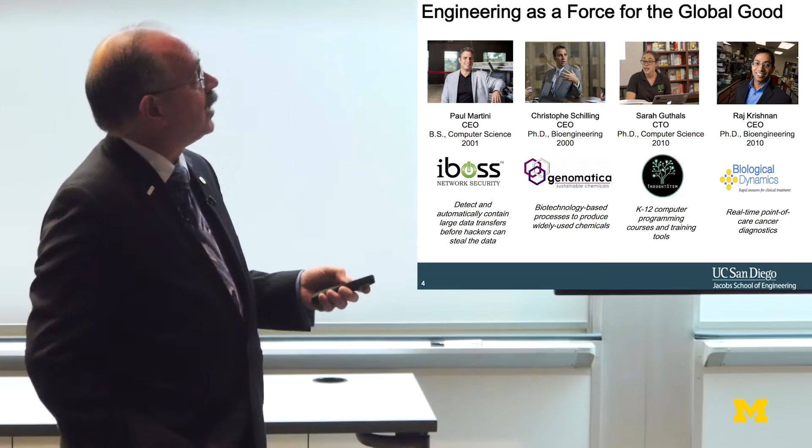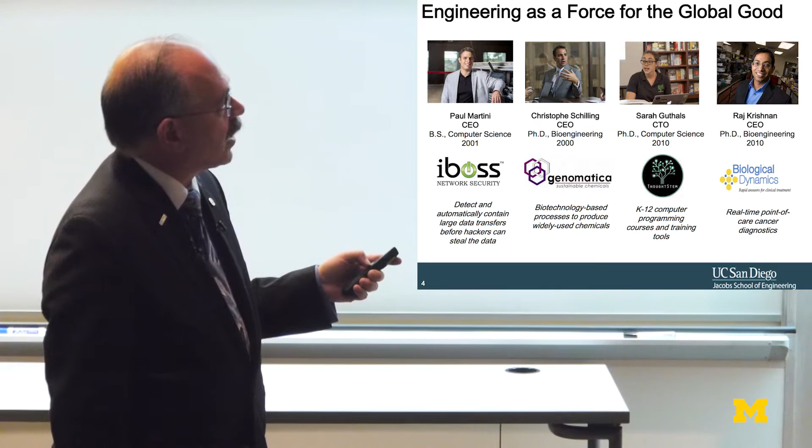And Raj Krishnan says, hey, you know, what if at the same convenience of a pregnancy test, or maybe more appropriate, a Lancet test for diabetes, you could find out if you have one of several common forms of cancer. Can you make a point of care cancer test that will use exactly one drop of blood? And indeed, he did the preliminary research in the bioengineering department, and he ran off and founded Biological Dynamics. So these are quickly growing and up-and-coming concerns. I'm sure every school has a similar set like this, but I just wanted to let you know that we're in the thick of it when it comes to the entrepreneurial effort.

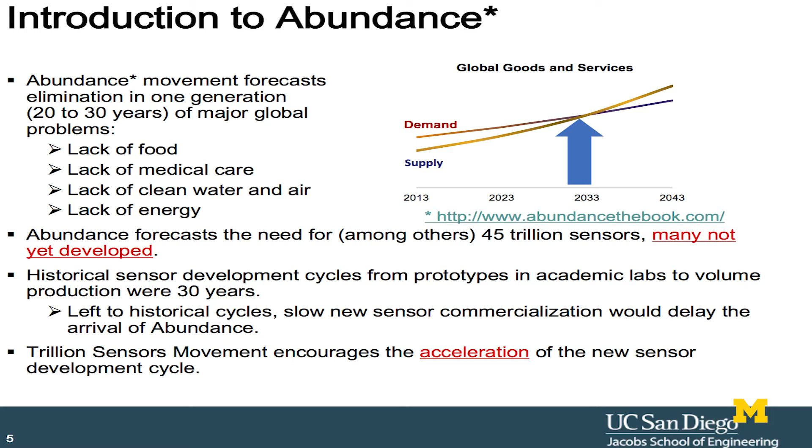Let's back up for 2 or 3 minutes and talk about a global issue, and then we'll dive down into particular projects. I don't know if anyone here has read the book by Peter Diamandis, and I forget the co-author, apologies to the co-author, called Abundance. It was a pretty popular reading 2 or 3 years ago among all the corporate CEOs, at least the ones that I knew about.

And the basic premise is this. I'm sorry for all this extra detail. I'll just cut to the chase, which is that this planet has a chance of shifting the supply and demand curves by somewhere near 2033 if we do a number of the right things.

By abundance, I'm saying, what if we could alleviate issues with food, medical care, clean water and air, and energy? What would we need to do in 20 to 30 years, in other words, in one generation, to shift the supply and demand curves for that?

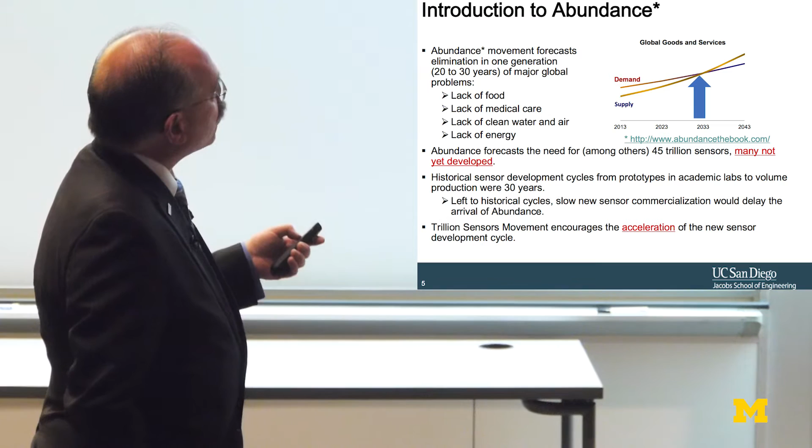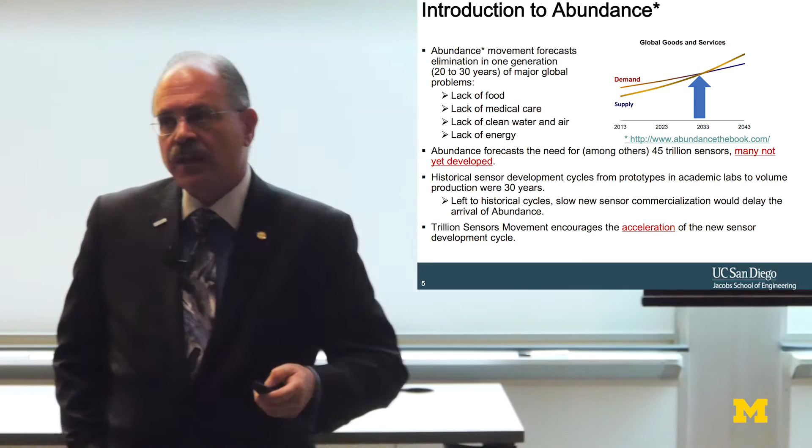I'm not going to talk about the sensors right now, but the point is, what industries would you have to launch? What industries would you have to generate engineers for? What industries would you have to clear the path for using policy decisions?

What industries should you grow in order to actually solve that problem? And if you believe what you read in the book, and I like to because it turns out my school's got all these covered, the idea is let's look for exponentially growing technologies that will basically get into large markets very quickly. The first impact is, of course, those companies will improve the quality of life in the first place. However, they will drive the global economic growth that we need in order to address many of the problems that these particular industries can't address.

Now, it's not the panacea, I'm not going to say all you need is engineers. We all know that it takes many kinds of professions to make the world go round correctly. But I'm offering the posit that if you make big investments in biotech and bioinformatics, medicine, nanomaterials, nanotech, networks and sensors - and my favorite part is I think we're going to need about 45 trillion sensors in the next 20 years - digital manufacturing, computational systems of other kinds, AI and robotics, you could argue how to divide those two. These are the areas that are really going to generate the big markets that we need to carry us forward from where we are now.

And if you look at waves of technology, 20 or 30 years ago, all the computer operating systems companies matured. The next wave was mobile apps. Now we're going through a wave of social apps. Well, what happens after those waves? I think some of the next waves are going to come from this list.

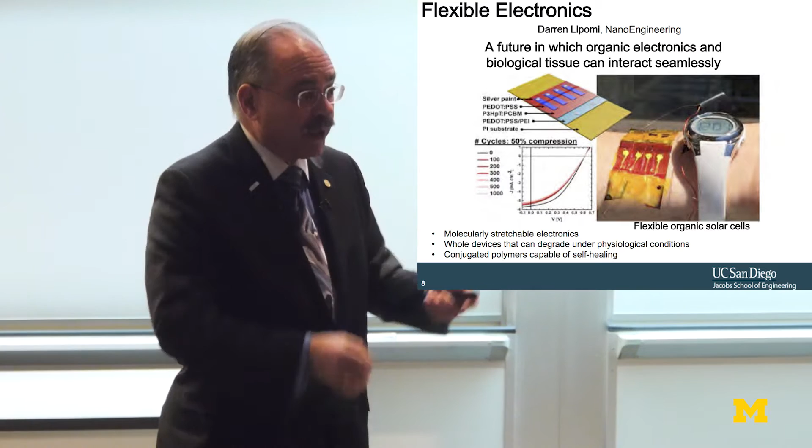And so just a few interesting examples of what you can do when you pull that group together. This is the work of Darren Lipomi, who came to us from Stanford. He does intrinsically elastic semiconductors. The molecules themselves have aromatic rings or other things in them so that they are intrinsically elastic. We're not making a spring by winding wire to add compliance - the wire is intrinsically elastic on its own.

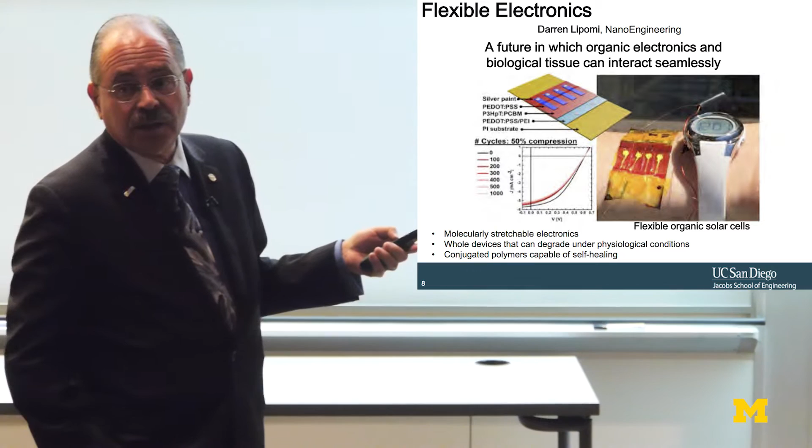To show just how effective that is, he's put an elastic solar cell taped onto an arm, with a wristwatch. We're doing a 50% tension compression test, and you can see that even after 1,000 cycles, the performance is the same as it was before. You just stretch it and come back, again and again, and it's still performing with the same output. So we've become very deep in molecularly stretchable electronics.

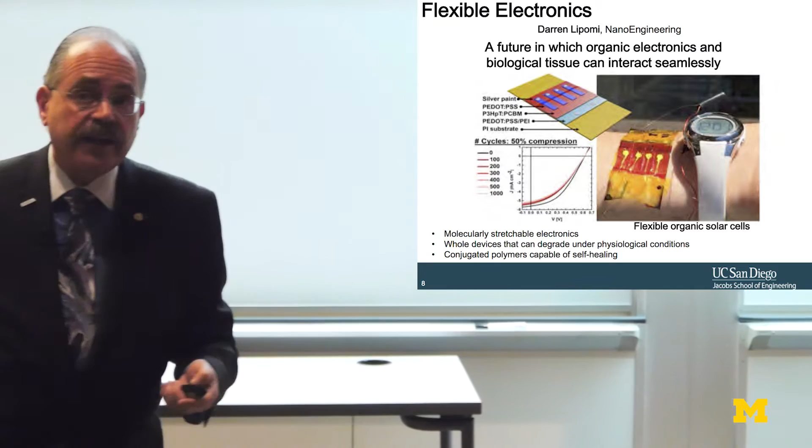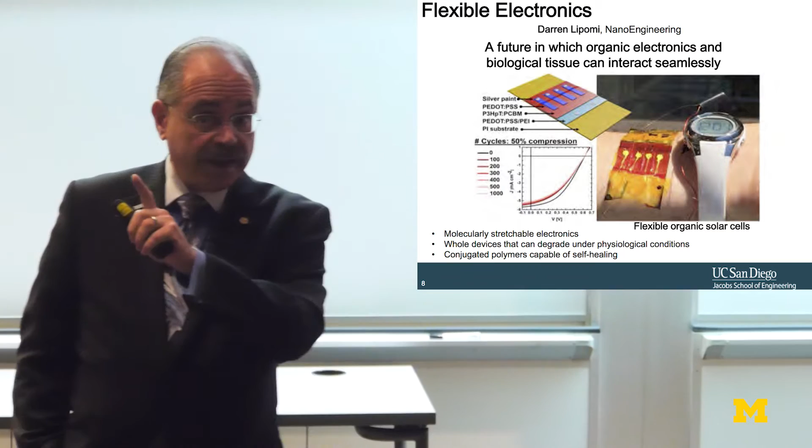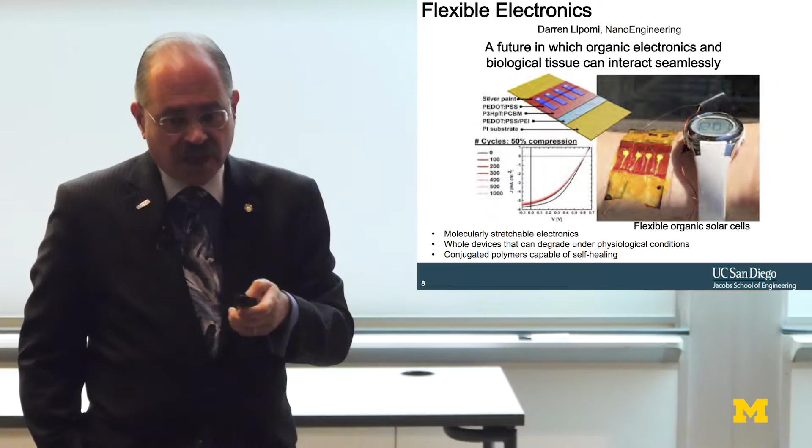If you know the San Diego region, you might say, yeah, you got great beaches, good. And you got the Navy there, the biggest port in the Pacific, bigger than Manila or Hawaii. But we also have one of the biggest biotech arenas in the country, first or second biggest. They call it the Mesa, the large flat rock formation just north of La Jolla, just north of the campus, where there's a huge phalanx of biomedical research. The Salk Institute is there, Sanford Burnham, all these places that really do a lot of biotech.

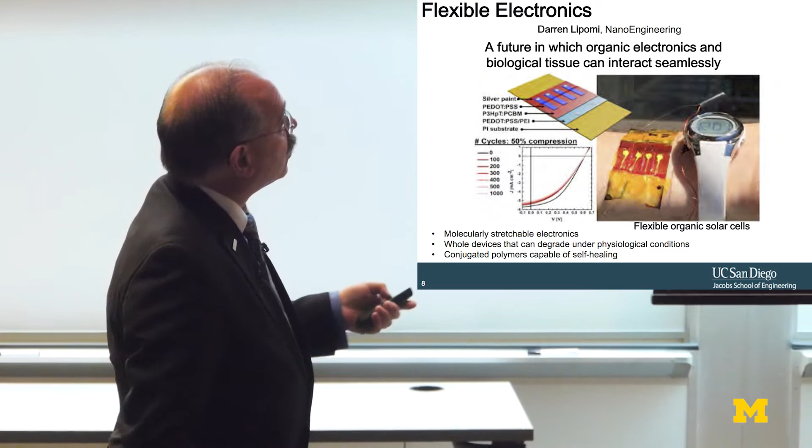So if you look at the fact that you can start talking about skin-level stretchable electronics that humans can wear, this has a big application in the biotech industry, the biomedical industry.

And indeed, if you come and visit, you can see this mannequin, which stands at attention, or more or less a San Diego style attention—kind of like surfer dude, maybe I'm paying attention to you attention. He actually displays a whole bunch of technologies, including temporary tattoos that measure pH, or metabolite sensors that can measure the lactate in your sweat.

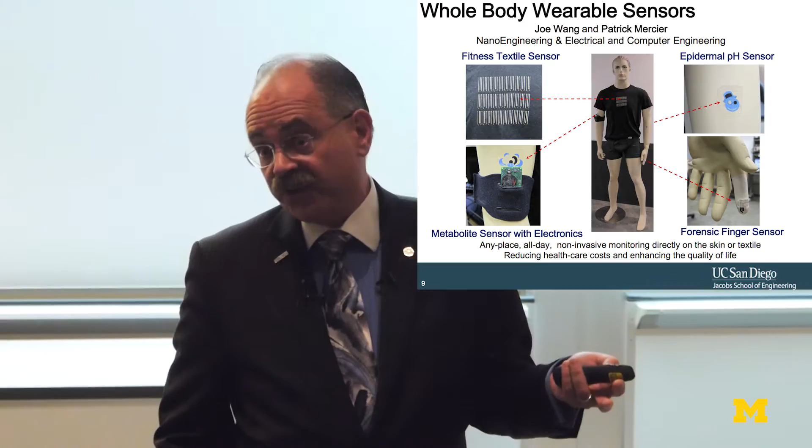Because you may not realize your sweat glands are filters, but they're only 98% efficient. So all you need—and I'm saying that sarcastically—is something 50 to 100 times more sensitive, 50 to 100 times less expensive, elastic, and able to run on maybe 100 nanowatts. And hey, you've got a functional sensor. Sounds like a tough set of technical projects, but we're making a lot of progress on that. Indeed, this is one of the areas we're concentrating on.

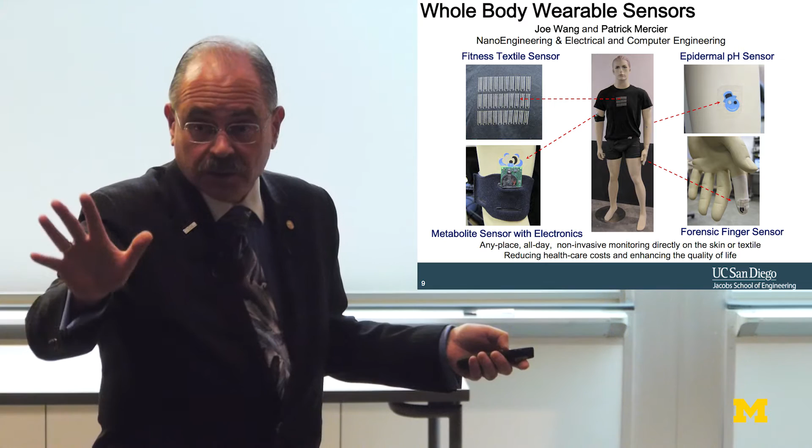By the way, you don't have to put all this technology on skin. You can put it on latex rubber, and then wear gloves that have sensors detecting deleterious chemicals that are harmful to your health.

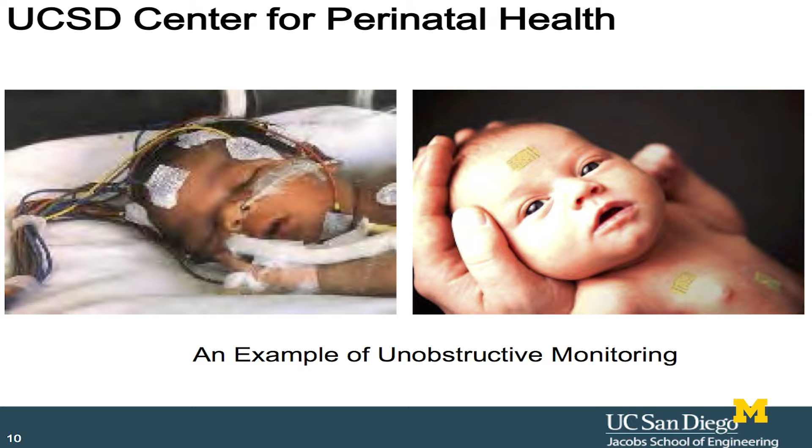This photograph has not been touched by Photoshop. This is an actual photograph, no mock-up here. The infant you see on your left is a premature baby in an intensive care unit, and the infant on your right is one of a set of test patients in 4 hospitals where the work of Todd Coleman is already being tested. The sensor you see on the right includes stretchable electronics, an antenna, some very low-speed circuitry, and we're actually making metabolic measurements on that infant, as you see in that picture.

This is not 'what are we going to do in the future?' This is happening now—he put these first versions out 8 months ago. Now, you're in a biotech hub and you start showing stuff like this around, and you get people talking entrepreneurship left, right, and center. So, I think we may be hitting a home run on this one.

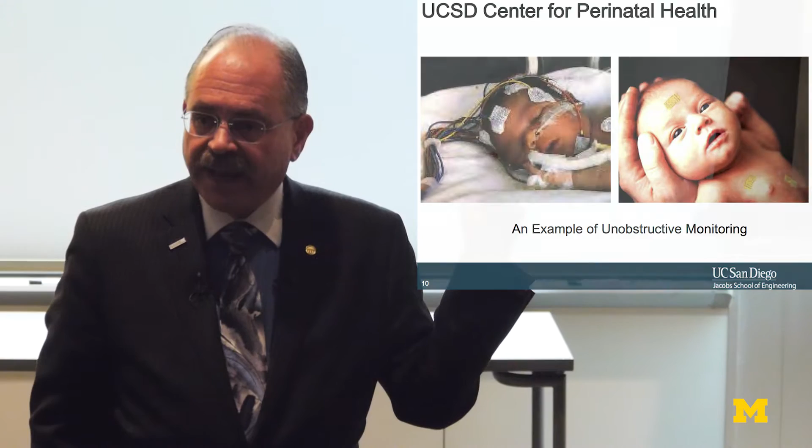The untold story here is that each of these adhesive patches is only good for so long, and there's a regimen by which you have to take the sensors off to let the infant's skin heal. Now, look at the size of the adhesive patch, look at the size of the kid, and ask yourself, how many times can I move that before I run out of fresh skin? That's actually a big problem. One of the issues with instrumenting up an infant is that you get all sorts of skin infections, which just add to the list of things the poor child is suffering.

So we're seeing a lot of push to move in this direction, and we're galloping forward as fast as we can. This is a close-up of Todd Coleman's work—an actual functioning sensor, I think this one is measuring lactate as well. You can see that you can squeeze it or stretch it; 50% strain is no big deal, and it remains functional.

The early work was actually published in 2011, and we're in hospital trials right now with this sort of thing. So there's a very direct example: we're going to do something that people are going to feel the difference about immediately. And I'm very pleased.

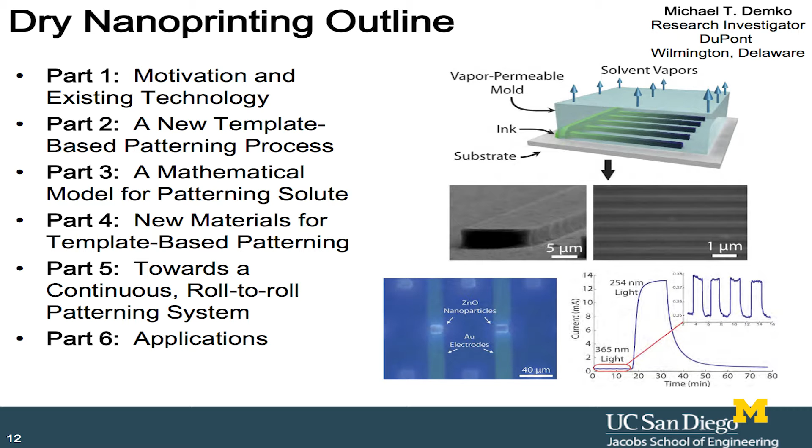So let me shift a little bit and say, well, it's one thing to make all those lab prototypes—how are you going to make 1 trillion of those? You know, 1 trillion's a big number. I know astronomical units come in groups bigger than that, and yeah, you can count molecules with Avogadro's number, but 1 trillion is pretty big.

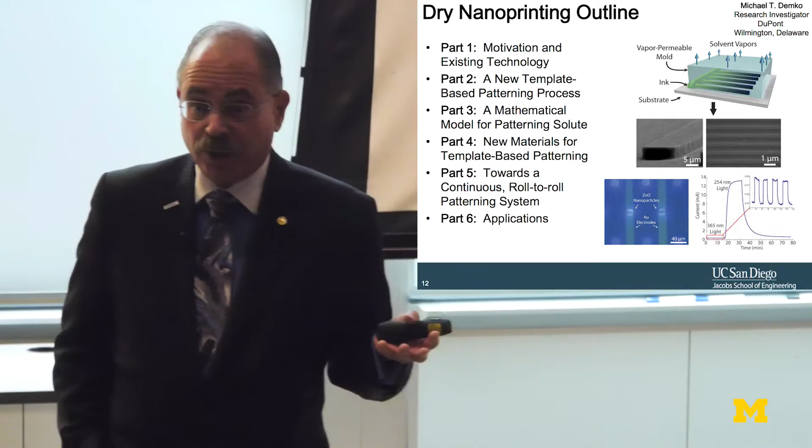33 million cars are made in the world each year—that's a big number. 300 million people in this country, that's a big number. 900 million cell phones manufactured last year—whoa, that's a big number. But that only gets you to 1 billion.

So imagine if everyone who bought a cell phone actually bought 1,000. Imagine the size of a pile of 1,000 cell phones. All right, that's 1 trillion. It's too easy to talk about big numbers, so let's talk about boxes of cell phones following you around—that's a big number. So what are you going to do if you decide you want to make 1 trillion of something?

So I say we're going to print them. Now I know there are many different ways of printing, but I'd like to spend a few minutes talking about how you might print them in an alternate way. And I'll give you the punchline. It's 4:30 exactly, I'm going to finish at 4:50 exactly. I'll tell you the answer right now, and then I'll show you enough slides to make you believe me.

So the way to do it is: one, you're going to use an ink stamper in which the ink flows into the stamper after you put it in contact with the surface. Second, you're going to keep all contact pressures at 1 atmosphere or less, because I'm not going to spend a lot of money creating pressure. Third, no temperature in the process ever is going to go above 60 degrees centigrade. And I'm going to print up to 4 inks at once with 1 stamper—put the stamper down, print 4 inks to do 4 well-registered features, then take it off. Oh, by the way, when I take the stamper off, the ink is dry.

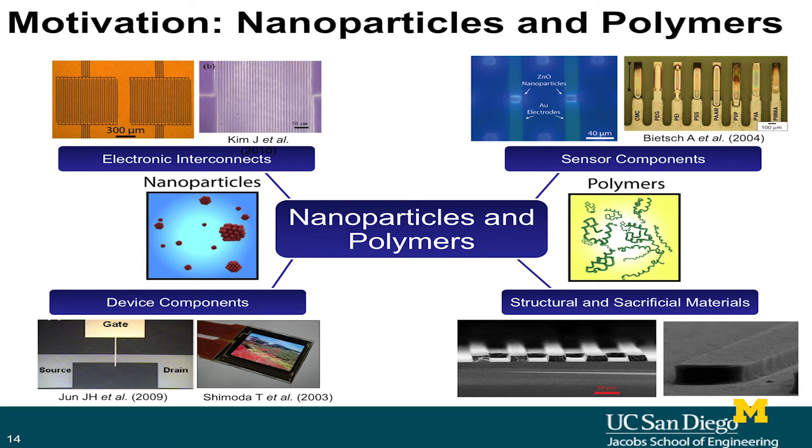So yes, we can talk about the genealogy of printing, and I'm not taking anything away from any other method because they all have special uses. I'm saying that I'm betting my money on template-based printing. And under template-based, you see things like gravure, nano-imprinting, or maybe micromolding in capillaries.

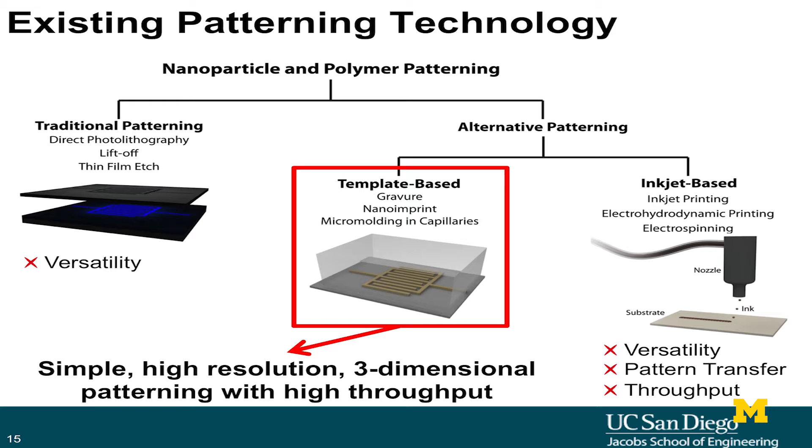Gravure is a great process for doing very fine, very accurate structures, right? But if any of you have ever done it, you realize that in gravure, you're spreading the ink first, taking a hard stamper, and crushing it down at great pressure in order to push the ink away from where it shouldn't be. That means you always have a cleaning step—which reminds me, I forgot to tell you, in the process we're using, no cleaning step either. So you don't have to, it's just done when you lift the printer's stamper. Manufacturing guys kind of like that, and I figure in this town, you guys understand what manufacturing guys like, right?

Okay, yeah, is it like I just touch it and wait and take it off? Yeah, it's done. Good, I like that. Let's truck that into the factory. So the game is the following, and again, here's the innovation that we did.

So you take a substrate and a template, where the template is either PDMS or PMP, a permeable polymer. All stampers are soft permeable polymers. The first thing you do is soak the template and the surface with water. No ink yet. You assemble everything wet, a complete wet assembly. There's no air anywhere. Then after you make contact, you apply nanoparticle ink.

You can just puddle the ink at the side, and it will naturally fill the mold. Everyone would say, oh right, capillary transport. The answer is no, because everything's wet, so there is no meniscus. It's not capillary transport.

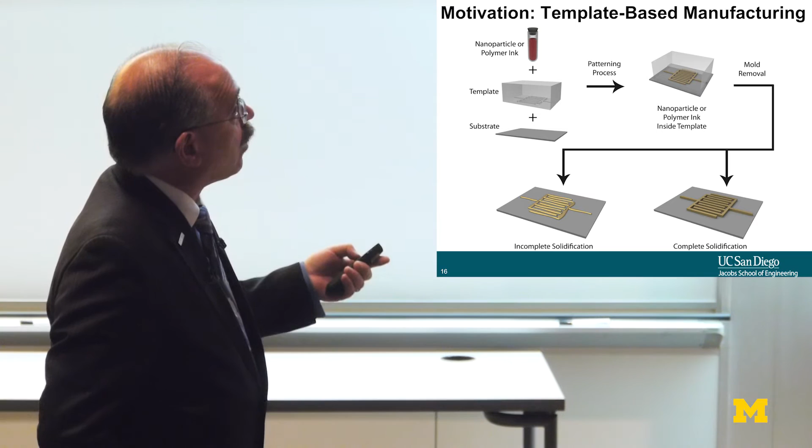What you're doing is evaporating all the solvent out of the permeable polymer, and it's actually a negative pressure process. So all your thoughts about laminar flows and capillary limits, no. We're going to dodge all those things.

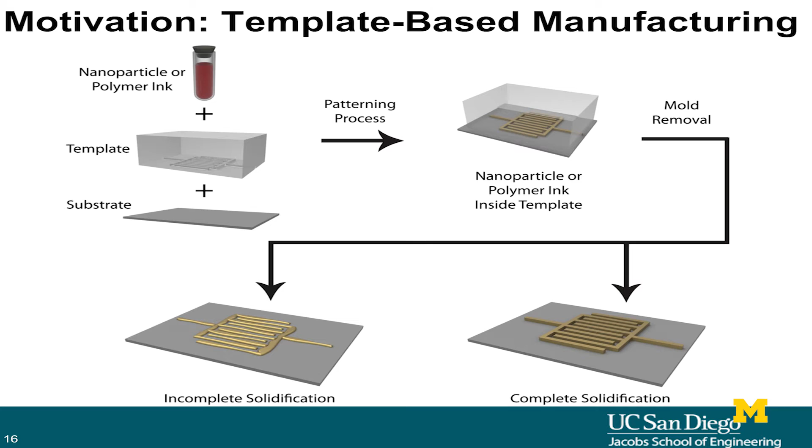What you do is make sure everything stays mildly warm so that the evaporation goes fast enough. If you take it off too early, you get this. If you take it off a little bit later, you get that.

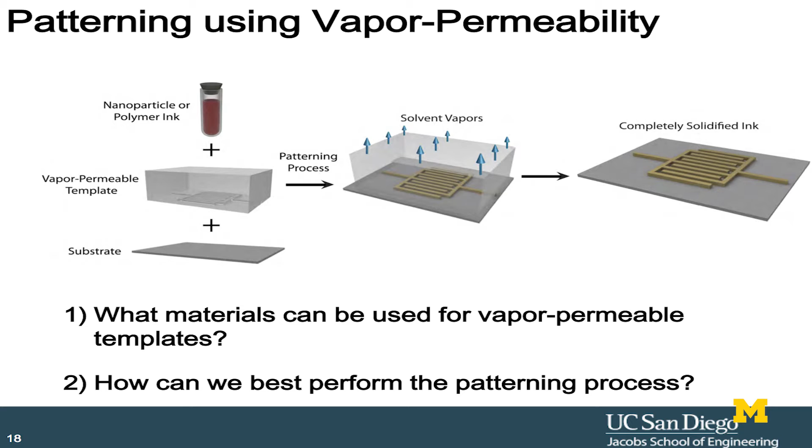The question quickly becomes, what can I use to get the water out of there as fast as possible? We're engineers, you get an idea, now you start peeling back the onion. Okay, wet assemble, yeah, but I want dry disassemble. So I need something that gets rid of water right away. And what's the best way to do the patterning process itself?

If you take a look at available materials, every MEMS guy is going to jump immediately to PDMS, polydimethylsiloxane, otherwise known as General Electric tub and tile sealer. The solvent for making that liquid, which you spin cast, is ammonia. So if you can stand lots of ammonia in your lab, you basically dilute silicone rubber tub and tile sealer, and use that as a MEMS microfabrication material, and it works fine.

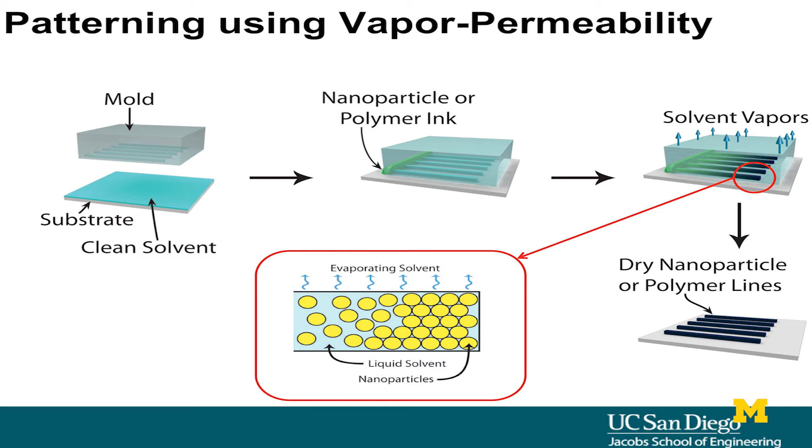PDMS works just fine. What we're showing here is that if you keep pooling nanoparticle ink at the left, using densities of about 1 to 2%, so it's very dilute. The organic solvent equivalent of this would be lacquer, mostly solvent and a little bit of pigment. So we're using very low density inks, and we're just waiting for the particles to pile up at the end of the capillaries. Then as the solidification front travels back, you're basically doing your printing.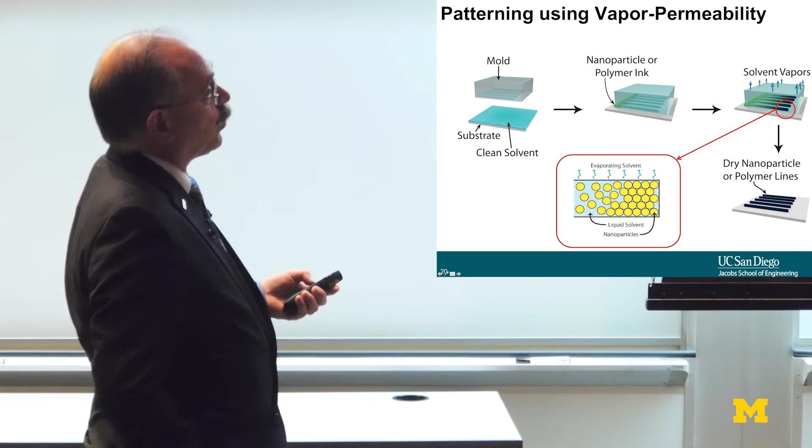Well, is it any good? Sounds like it kind of works in coarse mode. Let's just see how far we can push this process.

The first thing I'll show you is that using the same stamper, you can change all the chemistries around at will. For example, we're going to print gold nanoparticles on polyimide and then gold nanoparticles on glass. No big deal. The interesting thing is this is an absolutely clean process, we use this pattern to show that you do the printing, there is no cleaning step, and you cannot find gold nanoparticles anywhere else.

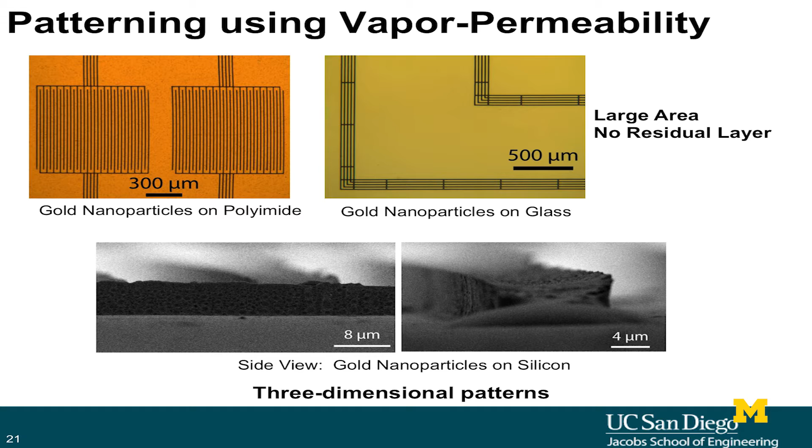Now, gravure guys have a hell of a time doing stuff like that. And if you look at the cross sections, you say, well, it's not perfect, but boy, that's pretty good for a soft stamper. That's a 4-micron size reference there, and that's a 5 or 6 micron high printed structure. Now, that's not easy to do with printed materials either.

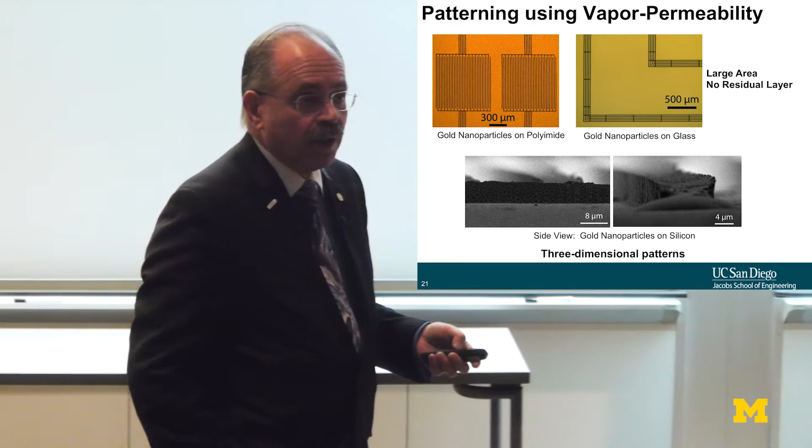Well, what other things could you print? How about PMMA on silicon, or a cell culture on glass? How about if you want to print PVDF, a high breakdown voltage polymer? Or how about chitosan on glass?

Now, chitosan is an interesting material. Chitin and chitosan are two versions of the same material, which is what nature uses to make butterfly wings, beetle shells, shrimp shells. It's a very good structural material of the insect world. Humans use collagen and calcium, and plants use cellulose.

Chitosan is also widely available. It is used to take heavy metals out of water. It's a filter material.

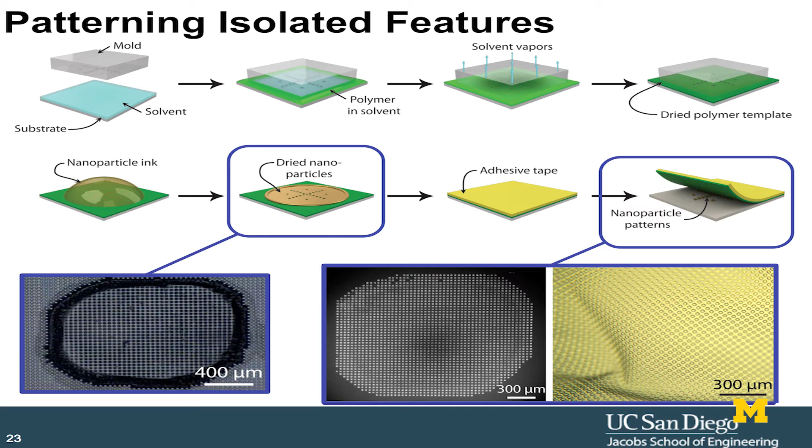We're going to use a secret template removal system called Scotch brand magic tape. It pulls off the unattached particles, but the ones that got through the template and touched the surface are bound by Van der Waals forces strong enough that Scotch tape doesn't pull them off, and bingo, you have yourself an assembled structure. And here's some examples.

Well, what if you want to print multiple inks at the same time? Well, then you have multiple channels. So here's an example. How about cellulose acetate and ABS plastic on glass? How about cellulose acetate and PMMA? How about gold nanoparticles and cellulose acetate? So simultaneous printing with a soft polymer and extremely good registration.

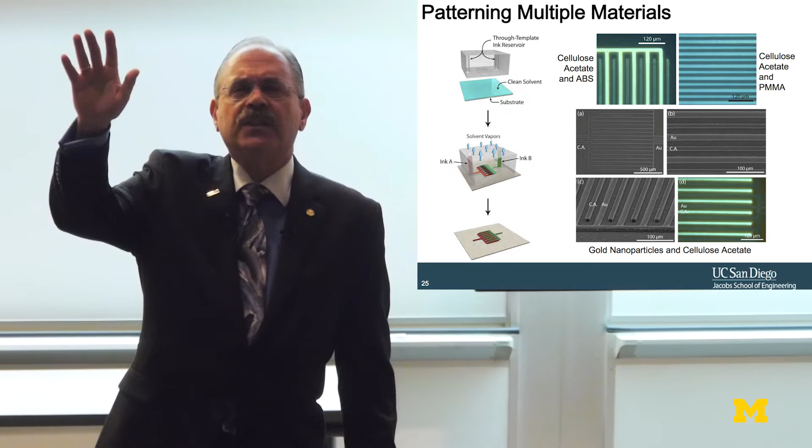I used to work at Xerox before I went into academia. I actually worked at General Motors and Singer sewing machines as well. Anyone need their sewing machine adjusted? I'm still good at that.

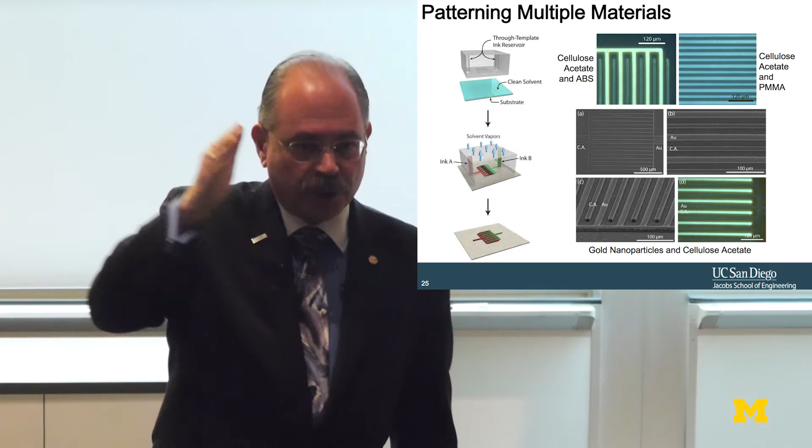The real point is, hey, you had to learn, man. It was the old days. First you're going to learn about everything we ever built, then maybe you're good enough to do something new. Anyone remember that? Okay, yeah, so I went through that hazing ritual. It was a good one, I guess.

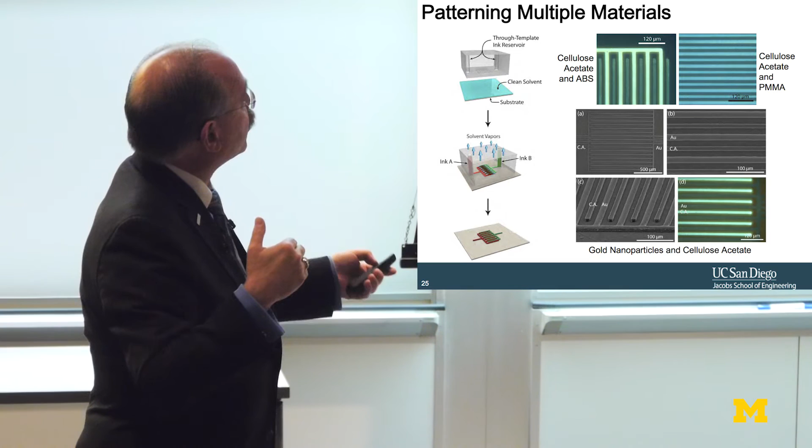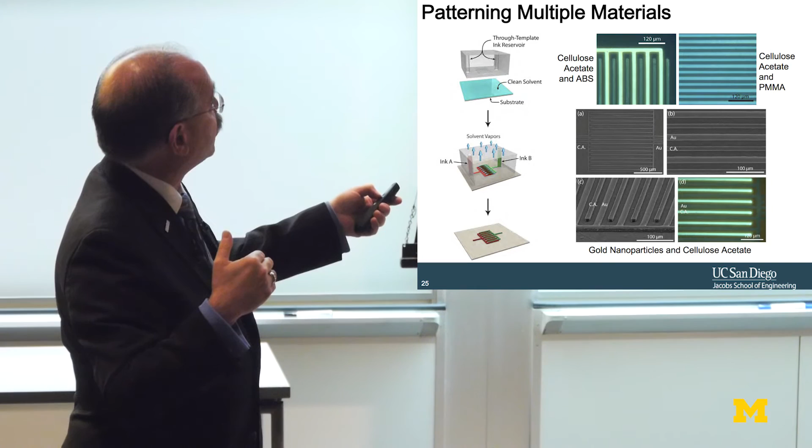The point is that these are all well-registered features. If you look at the size bars, 100 microns, 100 microns, 500 microns, zoomed out version there. There's a 120 at the top. So these are all 10 micron lines.

Can you push it? Can you go further? Well, I'm going to skip through some of the theory, which says, yes, we did do the PDEs. Okay, fine, single, one-dimensional analysis to be able to compute the solidification front. So yes, just like plastic injection molding, you got to size all your sprues right to make the flows right. Okay, we do that.

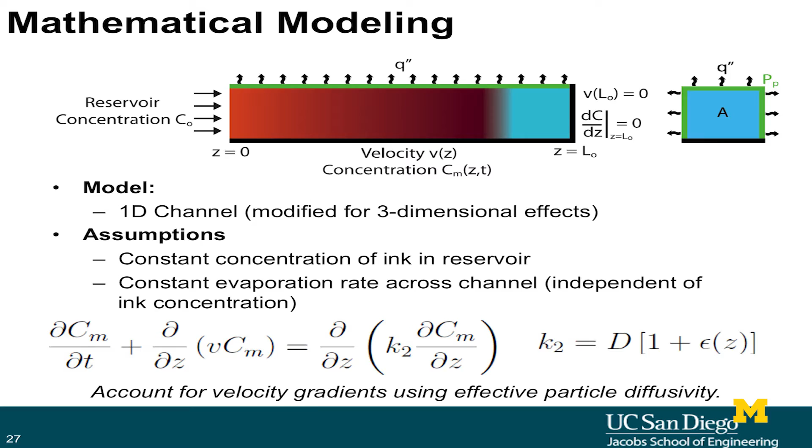We built all that up. We accounted for velocity gradients. The particles don't diffuse with respect to the bulk flow, they're too small, so they're trapped with the liquid. We did the mathematical modeling to develop some dimensionless parameters for how to pick the right concentration and how to look at the right time. And it turns out, no, don't worry about diffusion. The particles just go with the flow.

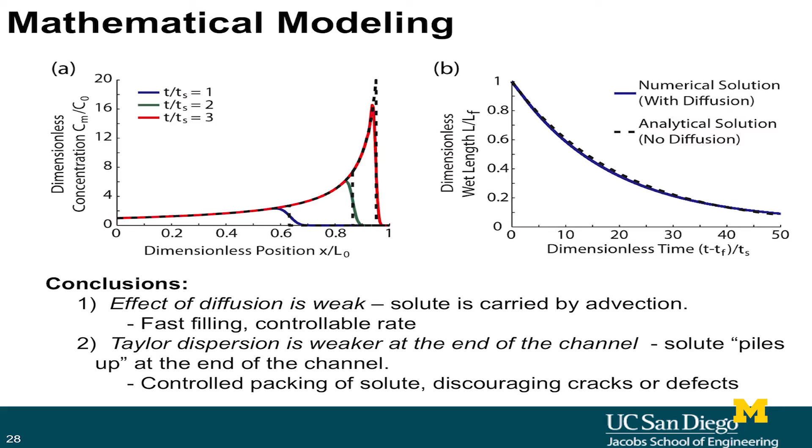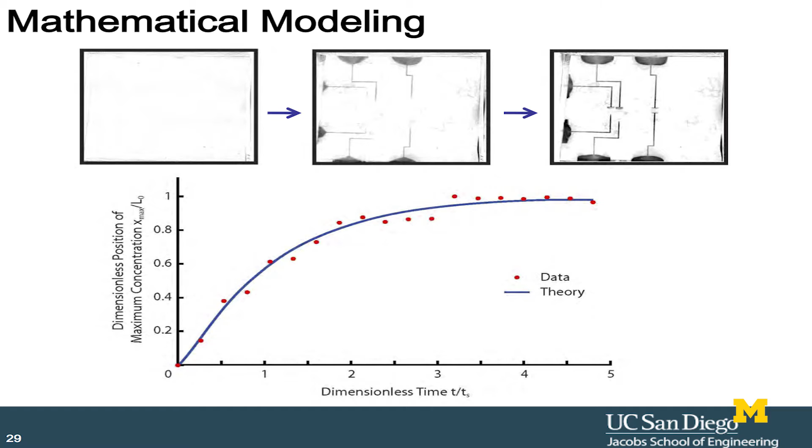The mathematical modeling lays right on top of the theory, the theory lays right on top of the data, so we're very happy. And these are test structures where we predict how far in we will solidify structures as we go. And that solidification front is fairly well defined as it goes forward.

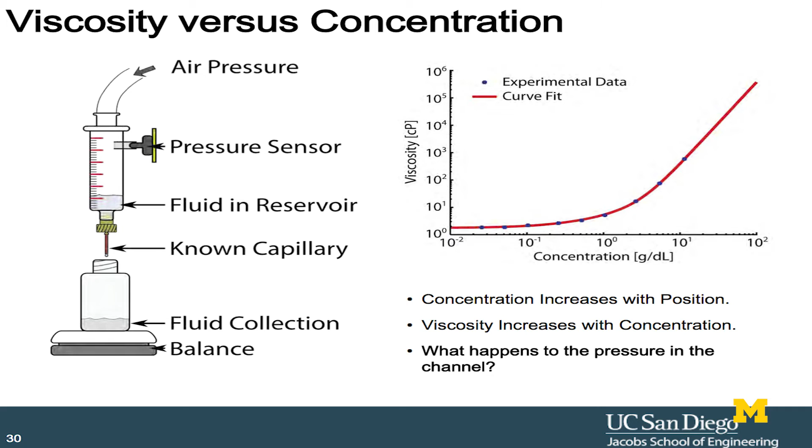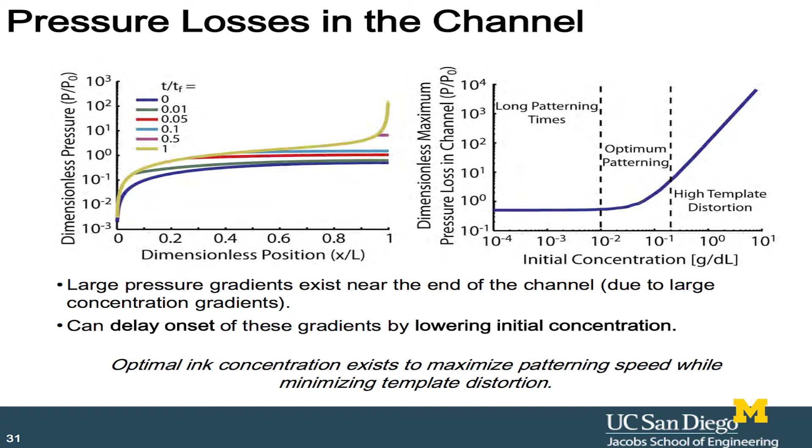We looked at viscosity, the fluid viscosity versus concentration, and so we have optimum curves for where this knee in the curve is going to be your sweet spot. That's going to set your ink concentration levels. And we even looked at pressure losses in the channel, not negligible under certain circumstances, but mostly negligible, and we actually found an optimum ink concentration to trade off long patterning versus template distortion.

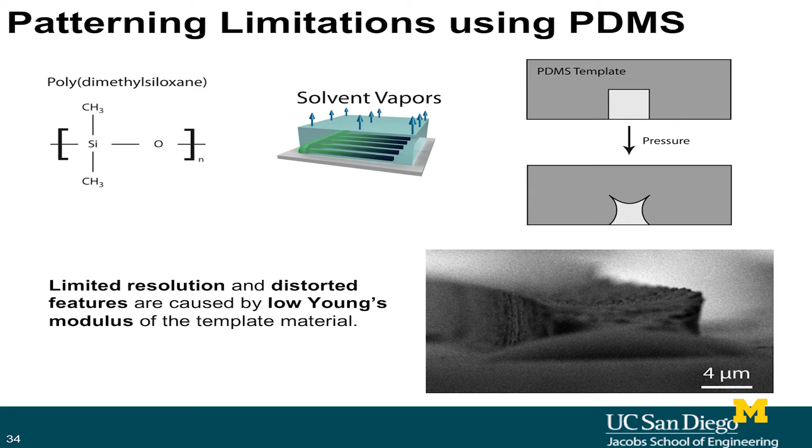Let's cut to the chase. Yes, we looked at the pressure effect on the PDMS. And the reason why we started really looking at this is that we noticed that feature I said was kind of okay. For a long time we said, wow, we're getting partial filling. We don't understand. Why would the particles want to go to the bottom in a regime where buoyancy just doesn't matter?

So why do we always have, do we have an air bubble? What's going on with this? And so finally we ran a calculation and said, hey, wait a minute, the PDMS is collapsing due to the negative pressure. This is subatmospheric here. The fluid is being pulled in, not pushed in. So this is actually the shape of the PDMS, and we checked the mold, right? Oh yeah, pieces coming off in the mold.

I don't see anything here, what's going on? So we finally said, all right, that's it. This PDMS works pretty well, but not as well as we need to.

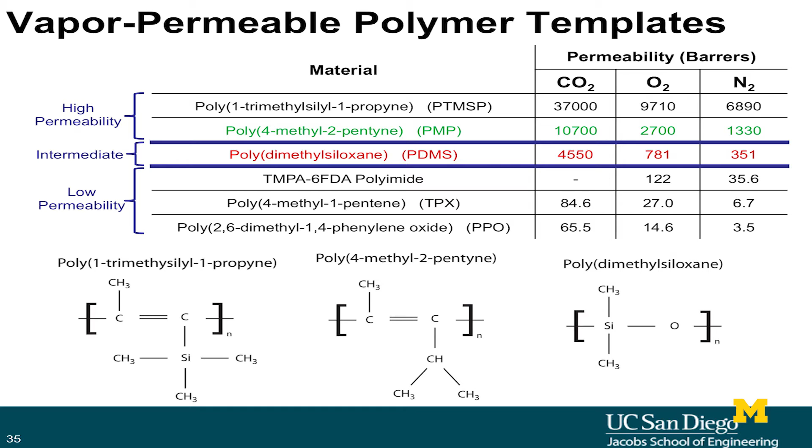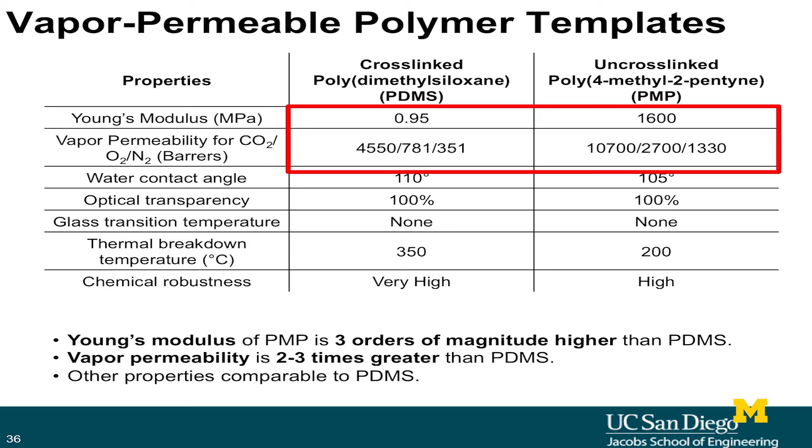Let's go one step up and look at this poly 4-methyl-2-pentyne, and look at the fact that it is much higher in permeability, meaning faster evaporation of the solvent, meaning the printing speed goes up. But what really blew us away, and maybe the chemists in the group would appreciate this better than me, but I was totally shocked: you can get a material that is 1,600 times stiffer and still have huge increases in permeability. The elastic modulus for PDMS is basically not even 1 megapascal, but for PMP it's 1.6 gigapascal. So the mold material is 1,600 times stiffer and more permeable.

So we redid all the calculations. All right, water's going to be moving this thing a lot faster. The flow velocity is going to be increased. You redesign all your sprues. We lock on to this.

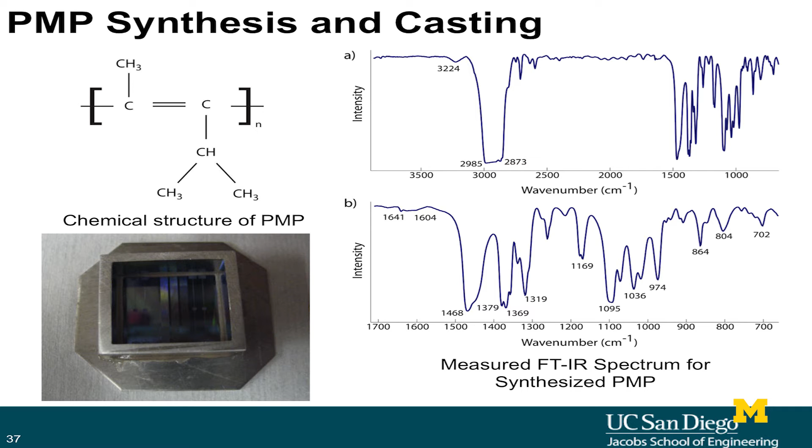But unfortunately, you've got to synthesize it yourself. So I had a student who was good at chemistry. We made our own spin casting system, synthesized the material from the precursors. I won't go through the multiple day filtering process we had to go through to make it nice and clean. We even did the infrared spectrum to make sure we're synthesizing the right form of PMP.

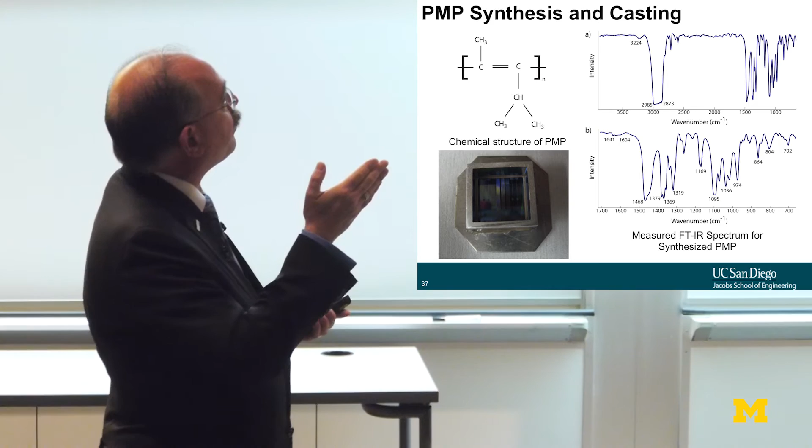Since the contract is over and everything's free and clear, I'll share a little secret with you.

So two different SAW filter companies came by and said, we saw this paper you published, and we're willing to take the research next step. Can you get down to 200 nanometer lines? Because as soon as we get to a 400 nanometer pitch, using lithium niobate, the piezoelectric material of choice for SAW filter guys, we're going to get to 5 or 6 gigahertz and take back that SAW filter market. So, son of a gun, economic interests and a real live company said, hey, we like your paper, let's see where you can take this next.

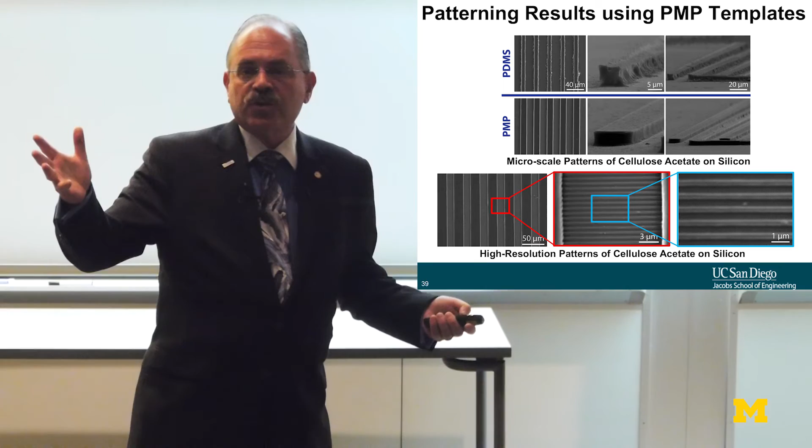So now we're starting to compare PDMS with PMP, and remember, we're using the same pattern with the sprues readjusted for the flow rates, printing the same features. This is a printed cellulose acetate on a silicon substrate - look at the straight sidewalls in a printing process. That is a 5 micron high block. Whoa, you could start doing transistor junctions, primitive transistors, with that.

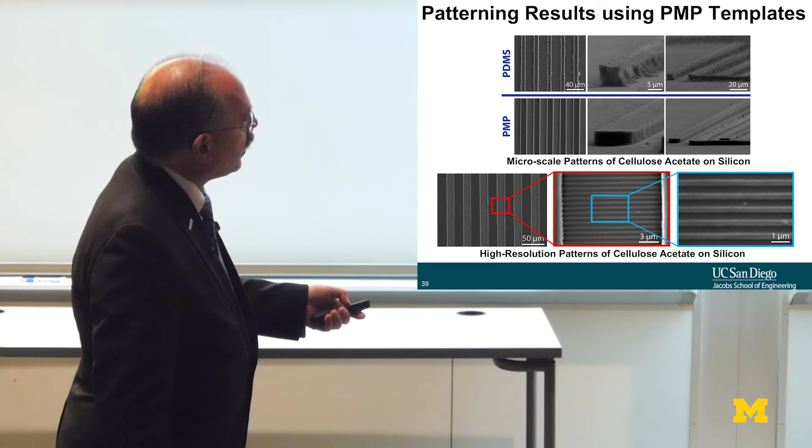This is an interdigitated pattern. And then when we took our test structure, you notice here we go from a sample of our test structure down to this size - that's a 3 micron length reference, there's a 1 micron, and these now are 800 nanometers across. That's starting to push the limits.

We put silver particles on polyimide, gold nanoparticles on silicon. Everything's looking good.

We're particularly proud of this result. These are 500 nanometer wide printed lines, nice and straight sidewalls, about 80 some odd degrees.

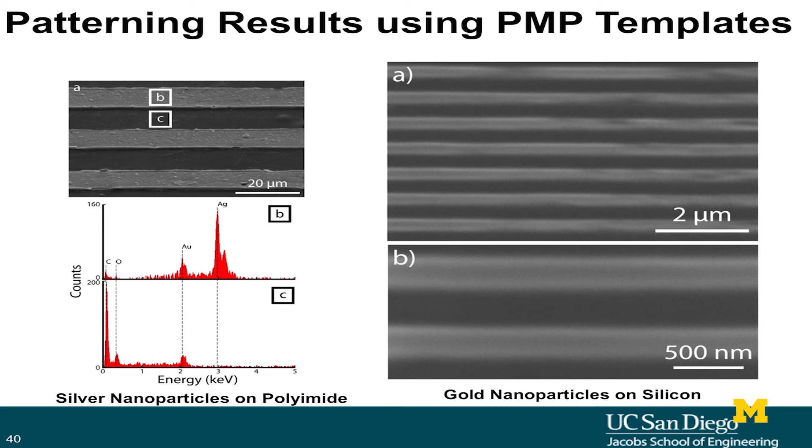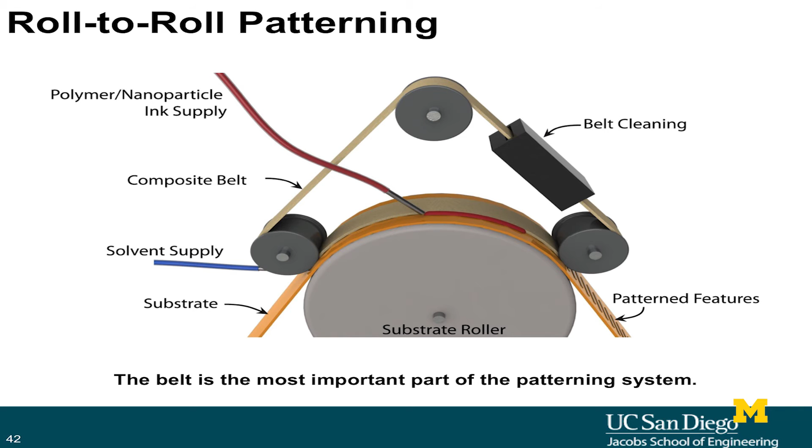So let's end in 1 minute and 41 seconds on roll-to-roll patterning. Now you want to go fast. By the way, shortcut to today, we print 6 inches by 6 inches. We now make PMP sheets 6 inches square. We print as big as a 6-inch wafer. And that's all because of the low pressure stuff. But let's jump to what the real future is.

Hey man, we got to make a belt, right? I mean, that's really the way to do it. So we did a quick prototype. We took aramid fiber belt, infused it with PDMS, and then on one side infused in PMP in a spin cast process and molded it at the same time. This is that crude piece of belt. This is a 1-inch square sample of stamper.

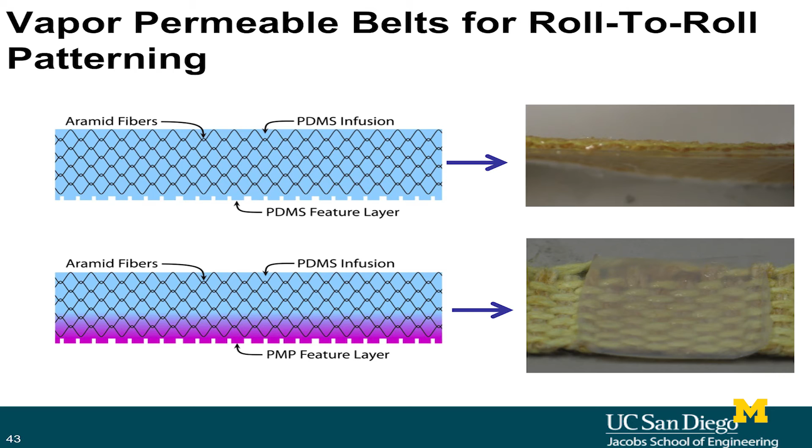And these are the things we print with the belt. I mean, wow. Remember, now you're rolling this back and forth on a cylinder to mimic a web process, so you are attaching and detaching. And even with that, look at what you got going.

Let's just go straight to the money shot. There you go, that's 5 micron. Look at the straight sidewalls on that puppy. That's looking really good. This is a 25 micron size. These are small holes in a sheet. We're printing this part, not the holes. And then these are 50 micron lines. That's pretty good for a first cut. These are first experiments on the belt-to-belt, roll-to-roll stuff.

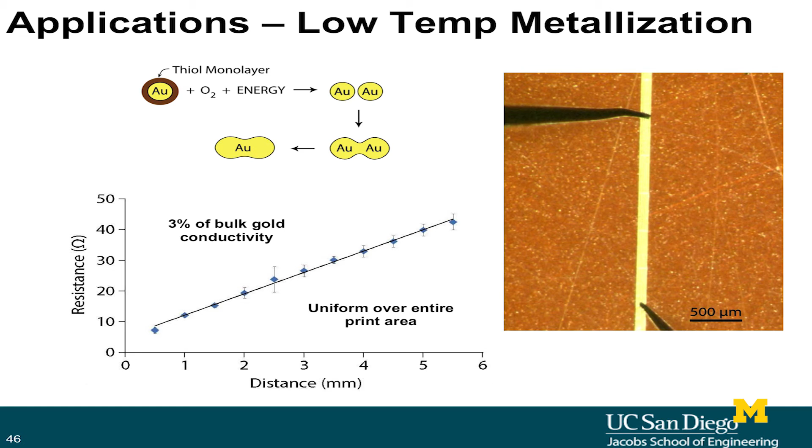So I'll just show one application. Yes, you can print gold. You get 3% of bulk conductivity. And yes, you can print 2 inks at the same time. This is a fully functional UV light sensor using zinc nanoparticles and 2 gold electrodes where the feeds come in from the side. So that's an actual printed device.

We took a look at engineering for the public good. There are a myriad of projects I could talk about. I zeroed in on completely elastic, completely stretchable, wearable sensors that are going to be a very high volume market, but need to penetrate markets where people don't have a lot of money. If you really want to have an impact, you got to drive the cost down. If you're going to do that, you're going to make a lot of them. And if you're going to make a lot of them, you need a new kind of printing process.

Why do you want a printing process that is as detached from the chemistry of what you're printing as possible? Because when you print chemical sensors, you need all kinds of different compounds, and I don't want to be in an ink formulation game. So what if all the chemical sensors you need, their reactive catalysts or whatever, could be put into nanoparticle form? You do an attachment molecule to stop them from agglomerating, and you just print any one of a number of chemical compounds you want as easily as you print different colors with an inkjet.

But you're going to need straight sidewalls, and you don't want it to be a high temperature or high pressure process because you're going to print on plastic or a whole bunch of other things. You certainly don't want to add a lot of heat because that's just going to drive up the cost, and you don't want a vacuum chamber as well. So if you strip away all of that and let the transport processes do for you what you need done, and you can use an easy-to-find solvent called water, I think maybe you got a shot at really moving things forward. So thank you very much for your time and attention, and I appreciate the invitation to come today and speak.